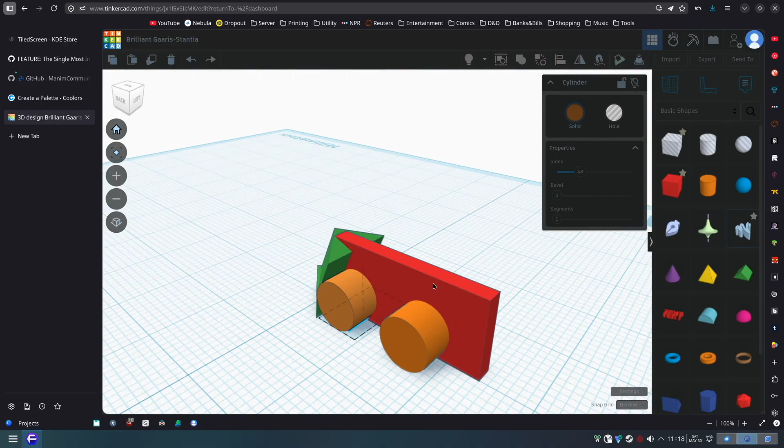My mother's visiting, so I decided to make her a Mexican train set. The first step was to get some dominoes and take some measurements for the hub piece. I couldn't find a train model that I liked online, so I decided to model it myself. I'm using Tinkercad because I'm a novice and I don't want to spend time learning professional tools.

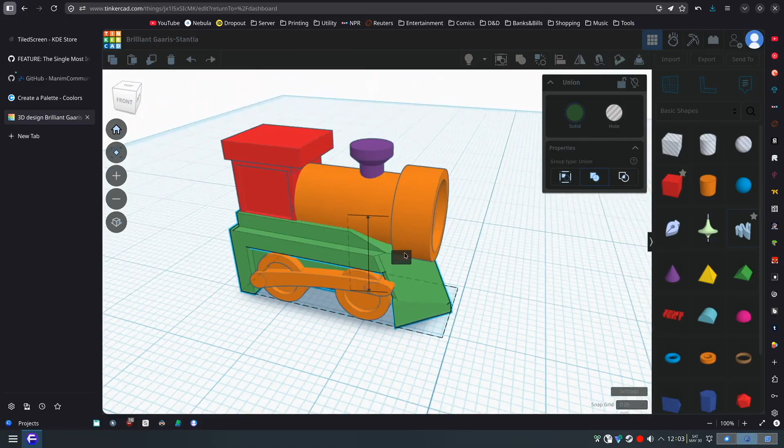Sue me. I have a 3D printer, but I don't want to give my mom 3D printed plastic junk. I want something that'll last, so the plan is to make the game pieces from epoxy resin. I'll need to use 3D printed trains, from which I'm going to make a mold, into which I'll pour the resin. I'm trying to ensure that the pieces here print well and mold well. That means I'm avoiding any large overhangs and adding slopes to allow bubbles to escape wherever possible.

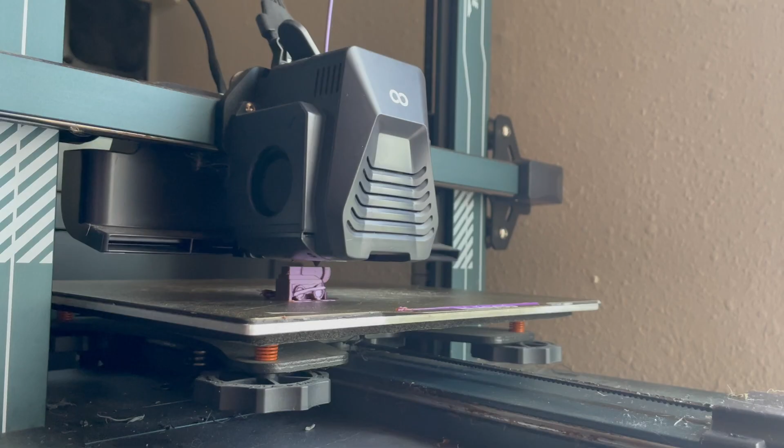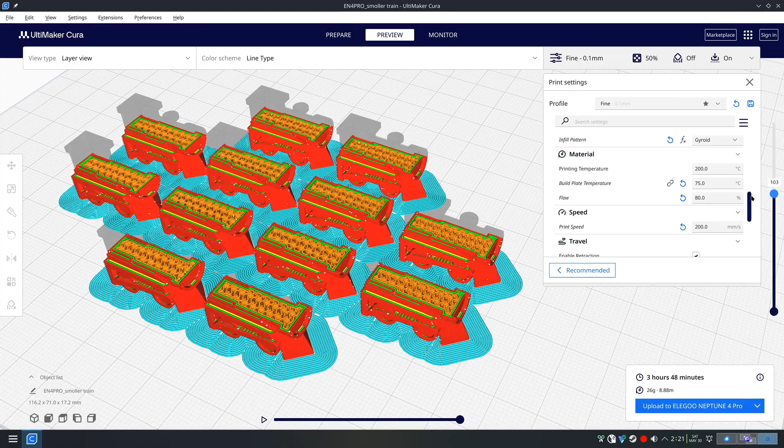It's not bad. A little taller than I think I'd like. I wasn't super happy with the first print, so I made a few changes. Namely, I made the pieces a little more squat, and the rear of the train looked a little flat, so I cut a little detail into it. And they printed pretty well.

Next up is the line hub. This thing needs to hold a domino and have spokes for the domino lines. The hub also needs to be small enough to fit in this antique train tin that I purchased to hold the game pieces. That means it'll need to be a little bit smaller than I'd like, but I'll make it work.

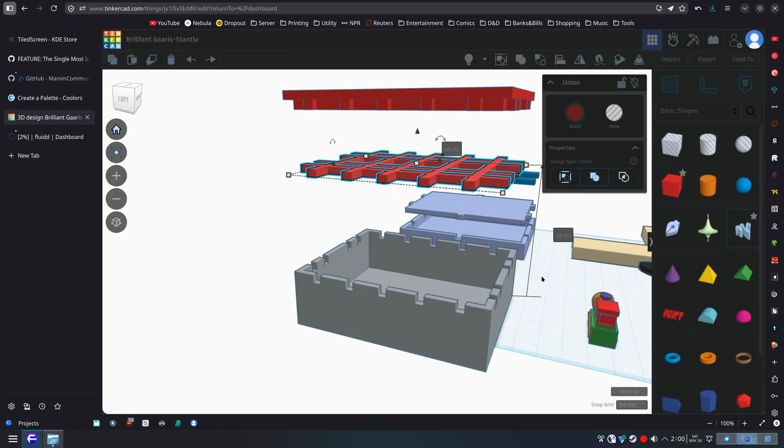The plan is I'll suspend the train pieces by rafters over a 3D printed tub that I can fill with silicone rubber. I also made a lid because I don't trust my cats. There are separate tubs with separate rafters for the hub and the train pieces.

Once everything is printed, it's time to start making the mold. I start by using a small soldering iron to weld the hub and the train forms to the rafters so that I can suspend them over their respective tubs. Once everything's in place, it's time to mix the silicone.

In hindsight, I probably should have worn gloves. I got some on me and that stuff itches. I think it probably has a bunch of heavy metals in it too, which isn't great, but the bigger problem was the itching when it dried on my skin. I also made the incredibly silly mistake of using a glass jar to measure the resin when I had a bajillion plastic cups that wouldn't have needed cleaning afterwards and would have worked just as well.

Once the resin is in the tubs, I noticed that some of it seemed to be leaking, so I decided to wrap them in plastic while they set. I think this might make them set a little bit slower since they can't exchange air as well, but that's fine.

A couple of days later, when it was time to remove the molds from their tubs, too much of the silicone had leaked through the plastic tubs, and the molds just weren't tall enough to reach the rafters. The print wasn't exactly watertight. I didn't think it would need to be. I also had to completely destroy the tubs to get at the molds, which wasn't exactly ideal.

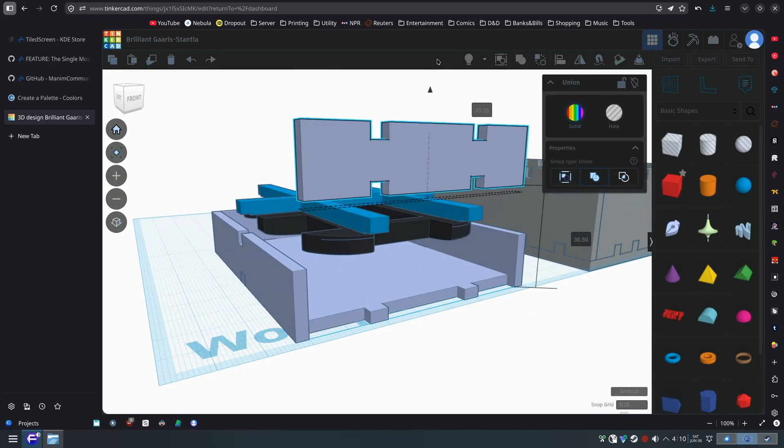So plan B, we're going to redesign the tubs with removable walls so that it's easier to remove them from the mold, and to reuse the tubs when I do the epoxy pouring step.

One set of prints later, and it's time for take two. This time I'm laying a base of aluminum foil in the tubs to prevent leaks. I also made the tubs a little bit deeper so that if the rafters warp, it'll be less of an issue. I'm welding the sides of the tub so that they're more stable, but thanks to the aluminum foil, I don't need it to be watertight anymore.

I'm taking a moment here to point out a small potential issue with the train volumes. The smokestack and the cab both go to the top, meaning that there will be a space between, which will be filled with the silicone mold. That means that I'll need to break off the smokestack when I remove the print from the mold, and I'll need to cut into the mold between the cab and the smokestack when I remove the final epoxy part. I don't want to suspend the train volumes in any other orientation, and I think it should be fine this way, so I'm rolling with it.

Once everything is assembled, welded, and suspended, it's time for the silicone rubber. This time, I decided to be smart and wear gloves. I think this stuff says to measure by weight, but I'm measuring by volume because I'm a rebel who doesn't follow instructions. I'm making a point of overfilling the molds a little bit this time, just in case of leaks, and I'm wrapping them in plastic again, just in case of leaks, even though I think the silicone rubber shouldn't contain acetic acid or anything that I think might react with the aluminum, but I also don't know what's in this stuff, so I'm being careful.

A couple of days later, after everything is set, it's time to cut the molds free from their tubs and remove the volumes. And let me just say, this was the most satisfying step. Just listen to that. Removing all the train volumes took a minute, as expected, but just listen.